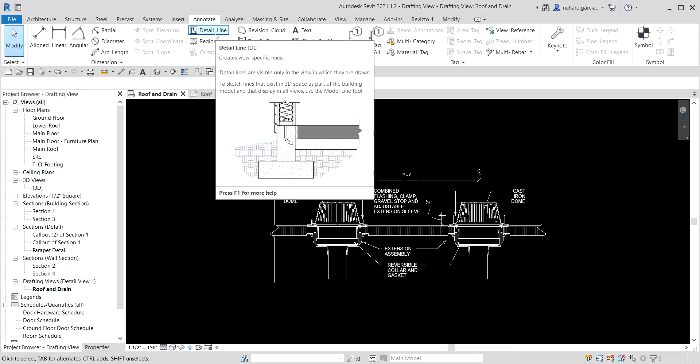In a drafting view, you create details at different view scales, and you need to use 2D detailing tools from the Annotate tab, such as detail lines, regions, detail components, insulations, reference planes, dimension symbols, and text. These are the exact same tools that we use to create a detailed view. However, the drafting views do not display any model elements.

So when you create a drafting view in a project, it is saved with the project. When using drafting views, similar to other views, they are listed in our project browser, under the Drafting Views category.

So all of the detailing tools used in detail views are available to you in drafting views, just like these tools that we have here. Any callouts placed in our drafting view must be a reference callout. I'm going to show you that later on.

And although not associated with the model, our drafting view can still be dragged from the browser if you want to insert it into your sheet.

Okay, so anyway, enough of the drafting view. I've been discussing the drafting view every time I create a video series because this is one of the most important tools in detailing. Now, let's say I have this drafting view created in this project, and I want that to be reused here on my new project.

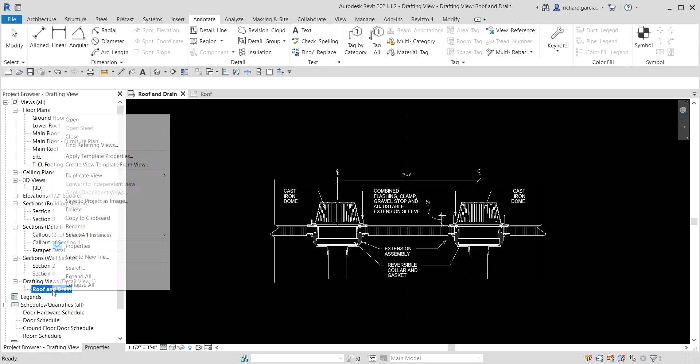So what you need to do is, from your project browser, look for the drafting view that you want to reuse. In my case, the roof and drain. So I'm going to right click this, and then there is an option here, save to new file.

Okay, so you just click that one, save to new file, and then just save the file.

So for best practices, what you can do is just create a folder and then put some subfolders there and name it. Let's say mechanical, electrical, plumbing, sanitary, domestic, or any other services, and then you put the drafting view inside those specific folders.

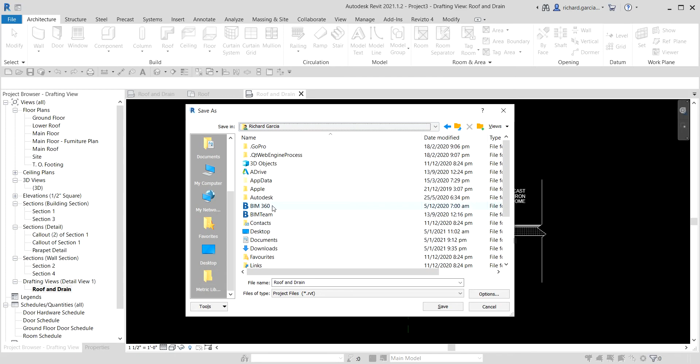So for example, let's say I'll go to my folder here, to my documents. I'll just create a folder here, and I'll put the drafting view, for example, mech.

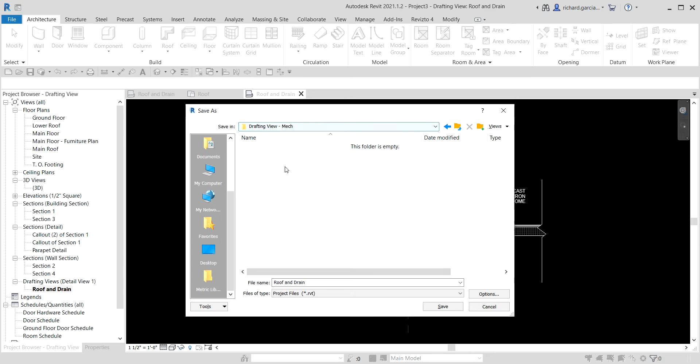Okay, so I'm going to save it here and call it roof and drain. All my mechanical drafting views will be saved in this folder so I know where to go next time. After you save the drafting view, just go back and close this one.

Now here on our new project, if you want to reuse that particular drafting view, go to the Insert tab, then insert from file, look for load from library, insert from file, and then insert views from file. It copies specified views like sheets, schedules, or drafting views from a project file and saves them in your current project.

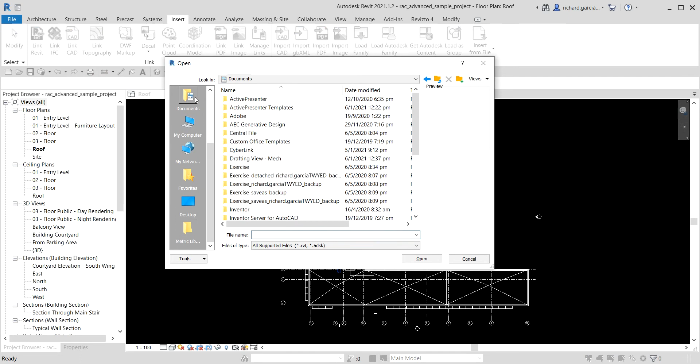Let's use that and look for where we saved it. So this is my drafting view. Just double click that, and there you go. Select open, then select OK, select OK again, and there you go. Just close this one.

So if you go to your project browser, just look for the drafting views here, and there you go. You just reused a drafting view from your other project. So from now on, if you want to use the drafting view, just insert it - insert from file, insert views from file - instead of opening the project that contains the drafting view again and copying it into your new project. That's not the best practice.

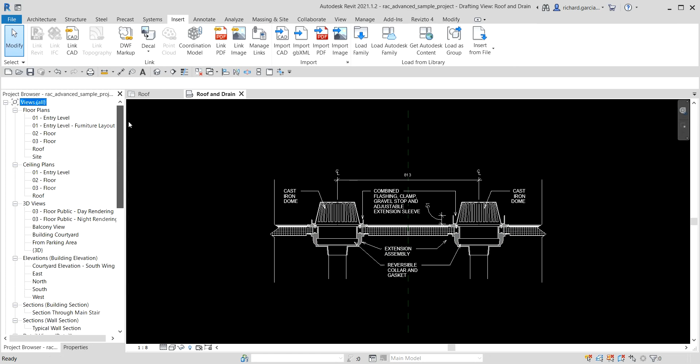Now if you want to use your drafting view as a reference call out, let's say I have the roof here and I want to reference a particular part of the roof to that drafting view. Somewhere here there's a roof drain. So what you do is go to the View tab, then go to Call Out, and create a rectangular call out. Select that, somewhere here.

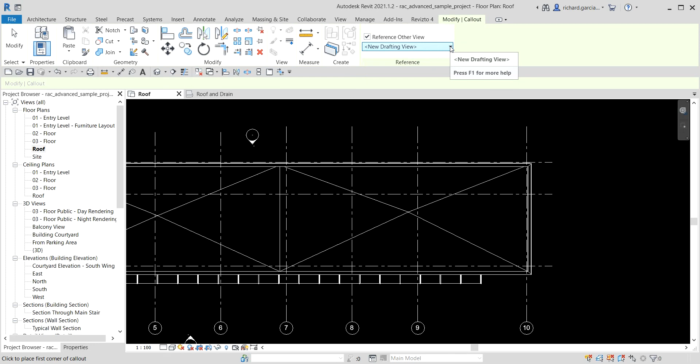Before you pick your first point, go to the reference panel and check Reference Other View. It adds a reference to a relevant existing view or allows you to create and reference a drafting view. Check that, click the drop down arrow, and you'll see all the drafting views you have - this is the one I needed, the roof drain. Pick one point here, then another point here, and there you have it - that's your call out.

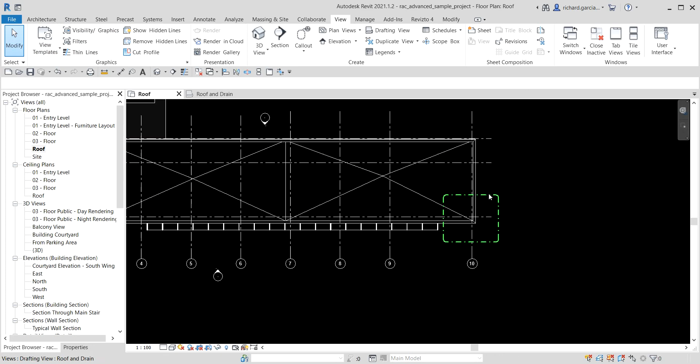So if you click that, right click, and go to view, it will go straight to that drafting view.

Okay, so basically that's it for this short video. That's how you reuse your drafting view, which is very useful, especially in detailing of your project. Hopefully you learned something from this video.